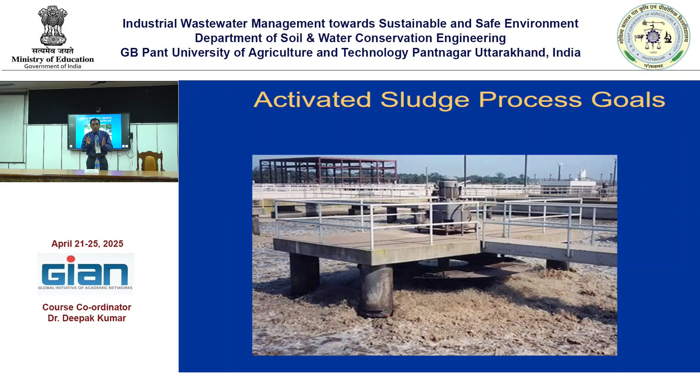But there are certain situations, if it is not biodegradable, we go for chemical processes. In the chemical process, what we are going to do is convert the pollutant or reduce the toxicity. We are making it less harmful. Sometimes we may be converting it into something which has not much impact on the environment or water quality. That is what we do.

So how did you find yesterday's site visit? See what you learned here, you can see some things are not working on it. That is why it needs continuous improvement and monitoring.

How will you do monitoring? You find out, do deep analysis, sampling, you analyze whether things are working. You want to see not just the influent and effluent, but make sure each unit is performing well.

I was giving you an example. If there are industries and they are big, they can have their own treatment. If they are small or medium, there is also provision. There are different methods to deal with the problem if you want to find a solution. That is one of the examples from yesterday.

So these are the causes. When you are discharging to a river, river means flowing - I have to add that definition today. So when you are discharging, we study about the mixing zone.

What happened? This BOD is 100, the BOD is 0 there. If maybe 1, 10, 5, 4, then you will see how much is the impact. There should be a proper mix where you are discharging. If it is stagnant, if you are discharging there, that portion will become an anaerobic condition.

And another thing, what you will see? You will see the oxygen concentration - how much is the oxygen concentration in the effluent and also oxygen concentration in the river. The river, it must be good. But whether that is happening, that you will have to see, right? Then you will find out what is the right position.

It is not that we have a discharge point here, whether water is there or not, the river is flowing that side, you will discharge there. So those are the conditions also you should keep in mind. That is very important. So what is your ultimate goal? It is to make it safe, to protect water quality and environment, create a safe environment. So you should also consider all these factors when you are doing it.

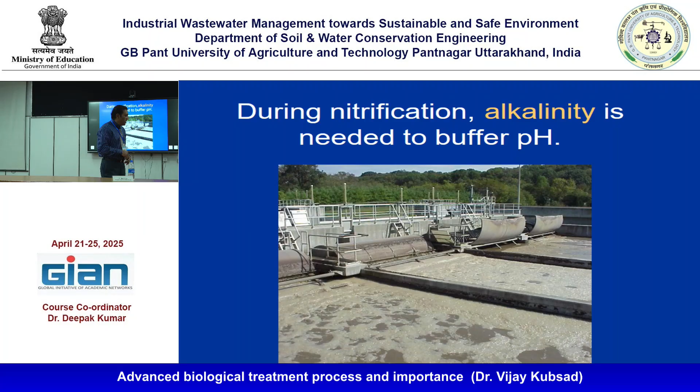And yesterday I observed two things. I'm happy that you guys were asking the questions, so I think you are good too. That's good.

You heard about COD, right? What do you mean by COD? It's not degradable, that's why there is a ratio. You should always make sure that certain things are not biodegradable. That's one.

Then, if it is a paper industry, what is another issue? It's always the color. They said in the paper industry we use decolorization, but it is hard to remove color from the system, it is difficult to remove.

So what will you do? You will have to put the limitation for the color. That is what somebody was asking yesterday, what the local people will do. See, in the general state standards, you may not be having the color limit for all industries. For other industries, if it is a food industry, you need not put the limitation for color. But if you are issuing an authorization to the paper industry, you know, in this area, this is a local area, so you should have a local limit for that.

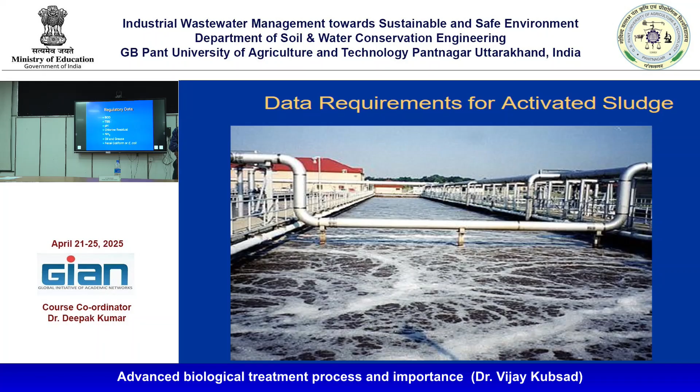So the total suspended solids, pH you know already, and chlorine residual, ammonia, oil and grease, and fecal coliform. What is E.coli? We always talk about E.coli, meaning what? If the concentration in the water is high, if you find the presence, you say that it is contaminated.

Why? The presence of E.coli bacteria shows that in the water there is a mixture of sewage. So that's why we say that is the indication that this water is not safe. That's why when you are discharging it to the river, we want to make sure whether there is any contamination, right? Your discharge point to the river should be such that in the flowing water downstream, there should not be any intake for drinking water purposes.

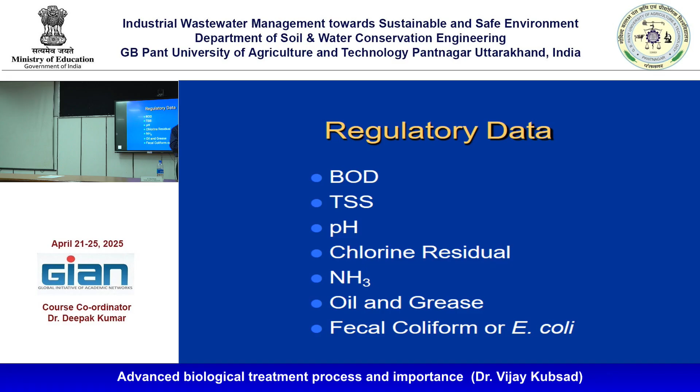There is a town, they have an intake structure there. They take the water from the river, treat it, and supply it to the people. That is why you cannot discharge upstream. How will you calculate? You can calculate there. That is how I said, what is the BOD, what is the oxygen in the river, oxygen from the industry which is discharging, and then you will find a combined value of BOD and oxygen.

By the time it reaches, it should not have any value, zero. It should just look like water. If you discharge very close to the intake structure there, that means you are providing this contaminated water to them. So those are the things you will have to think about. That's why when you find the location of intakes for water supply, you are always careful. Is there any pollution? You cannot take polluted water, invite a problem, and then start treating it. That will not be healthy. So that is the reason you should have this kind of data.

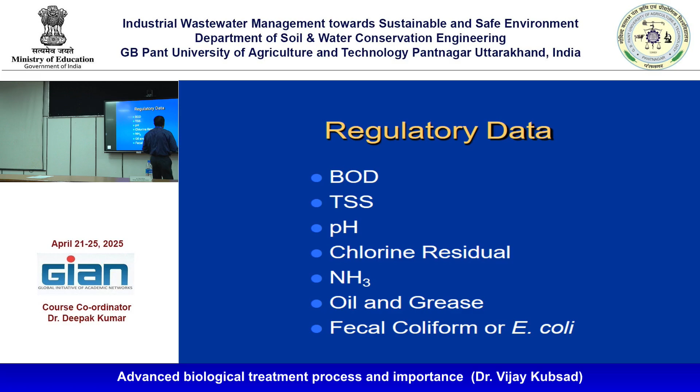And what are the approximate ranges? As an environmental engineer or scientist, you should know the approximate values, right? People working in the field, that's why that is all important. What is the range of value? You should be able to say, this is the range, you should have that understanding, right? Not just, sir, it depends upon these factors. If you start telling that, what will the other people do? So you should give an understanding because you are dealing with people who have different backgrounds. You may be knowing that it's true, it depends, but approximately what is that? That is how you do in construction.

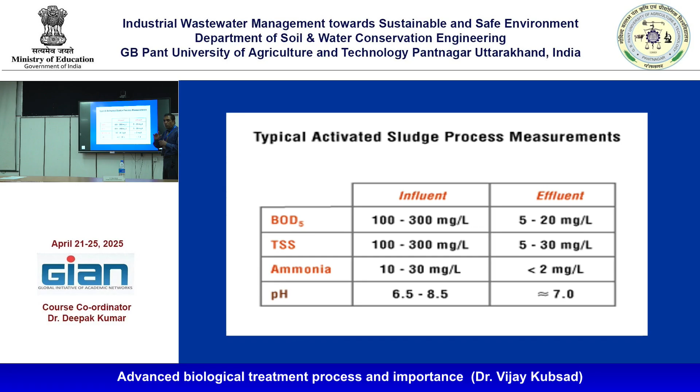BOD, influent, effluent in the activated sludge process, measurements, ammonia, TSS, pH - approximately we want to have these numbers. And process control data.

In the process control data, what we see is settleability, how much settlement of suspended solids, DO, temperature, depth of the blanket, and blanket thickness. And we see more process control data: flow rate, pH, microscopic analysis, solid concentration.

There are equipment where you can find this out roughly, and you can also go further to do the analysis. There are online flow meters, online pH meters. You should be able to test it immediately. Now they've been made handy, right?

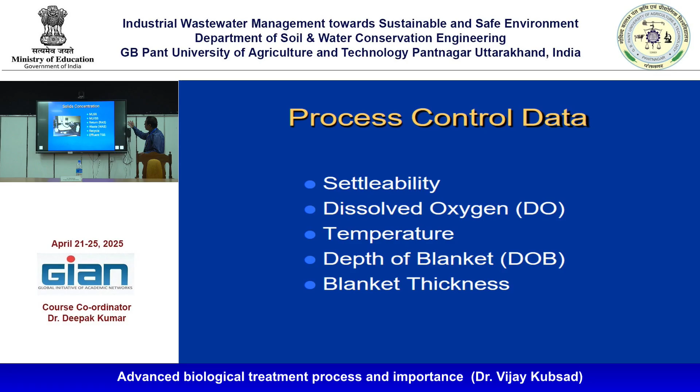And solid concentration, we talked about it - what is the return sludge, waste sludge, recycle, effluent, TSS. Then flow rate: inflow, return sludge, waste sludge. Waste means some of the sludge will be sent to the thickeners and some will be recycled. That's why it is called an activated sludge process.

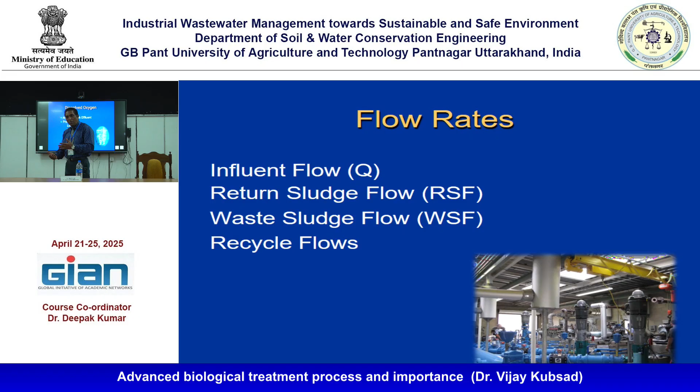Then dissolved oxygen, aeration tank, effluent profile. Aeration is done in different ways. You might have seen yesterday's aeration - aerators fixed in the bottom. In some places it is from the top. When you do that, why do you do that? One from the bottom and one from the top.

It depends on depth. If the depth is less, you want to fix it on top because it will settle to the bottom. If the depth is too high, you want to put a diffuser at the bottom so that the corners are not left untreated. So oxygen is supplied uniformly - you want a uniform mixture or supply of oxygen to the organic compound, then it will be right.

Transfers also they give - if you want more oxygen in a small space, you want more flow, then that is a design consideration. You want to have it from the bottom, the top, and the side. Because in your area in the cities, you are lucky to have a big place here. In the cities, very small places, but you still have to do it, right? So it depends on what kind of aeration system you have.

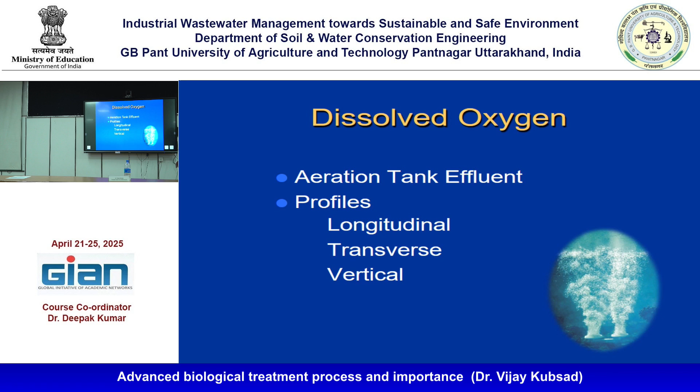Then the temperature does affect the metabolism rate of microorganisms. See, there are filaments in there. Anybody with a background in biology? Good, very good. And chemistry people also study this, right?

In case of biology, you will analyze what kind of microorganisms are there in the biological system - nothing should be unknown. There are different ways you can take a sample and find out what kind of bacteria are there, and how they are helpful. If it is domestic wastewater it is different; if it is industrial wastewater, over the years or months of time, it will acclimatize. Certain bacteria which are more immune to that kind of pollutant start growing and they will be helpful.

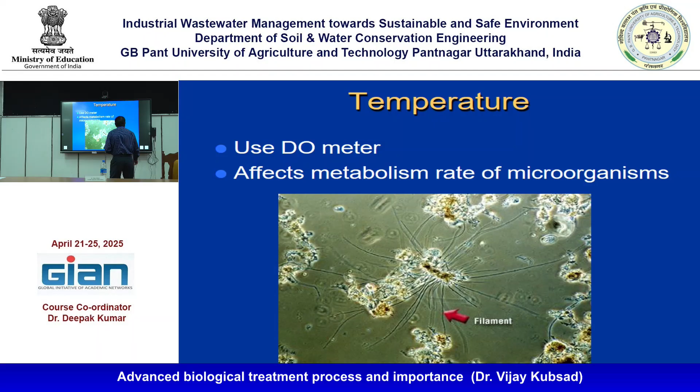Then the settleometer test - use a settleometer, don't use a graduated cylinder. Fresh samples, take the sample near the effluent weir of the aeration basin. Where you want to take a sample is also important. You don't want to take a sample where there is less pollution - we want to see the maximum. You cannot design things with a minimum value or average value. You want to design for a maximum, then you want to confirm it also works for a minimum value.

So that is how we want to make sure when you do any inspection, first you will see where your sampling is, how you decided it, why you want it here, why it has to be here. Those are the things you will have to look for. You want a representative sample data so that you can make a good design and good determination and decision.

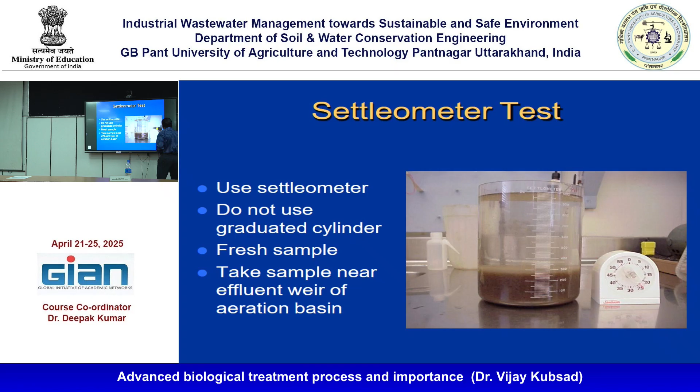If you want to create a model, you should have perfect and good data to design it. If you have taken only a few unreliable data points and you do the model, how will it be? You have to justify how your model criteria works. That is why those data are important. How does a clarifier work?

Flocculating, settling, compacting - allow the biomass to settle to a reasonable thickness. Flocculation and clarification clarifies. We add certain chemicals if particles are not settling, because colloidal particles are negatively charged and want to stay apart. So you add chemicals to reduce that distance, bring particles together, make them bigger so they can settle. That is flocculation - you add chemical, mix it, then take it to a peaceful place to settle.

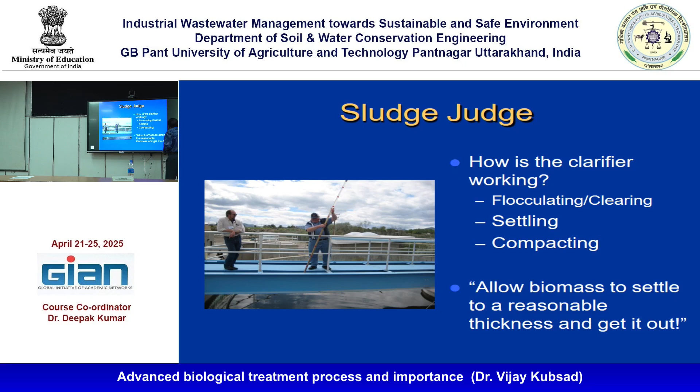Clarifier problems typical causes: bulking, sludge quality, hydraulic overloading, denitrification, old sludge. You want to keep removing the sludge, keep the system fresh and efficient. The job of those responsible is not that easy - it's very important what you do day to day to make it efficient. If your designed efficiency is 85, 90, 95 percent, but it's performing at only 30%, what will you do? You calculate at 95% - how will it work? That is why in the real world this data is important. That's why you do daily monitoring, weekly monitoring, monthly monitoring, analyze it, and apply your mind to check whether things are working in the right direction.

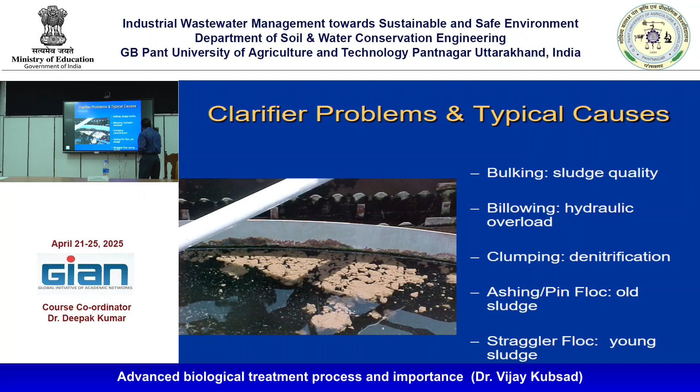So microscopic examination includes general floc analysis, protozoa counts, metazoa counts, filamentous abundance and location, identification of filamentous organisms. They are responsible for degradation of organic compounds to a stable form - stable meaning there is no smell, just carbon dioxide and water.

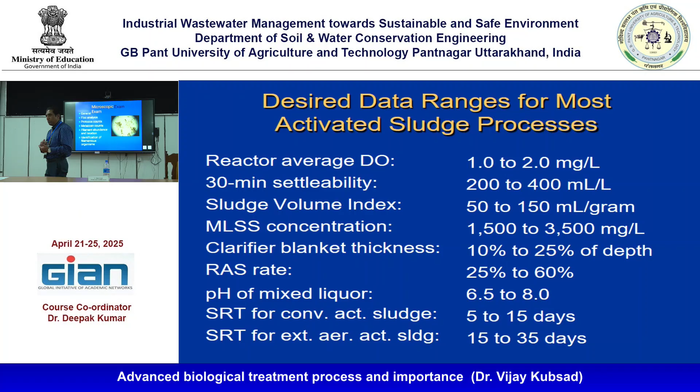The moment sewage comes out of the house, the reaction starts because healthy conditions, temperature, and oxygen are there. So you find out how much reaction occurs by the time it reaches the treatment plant, because there are open channels taking it to the sewer system. In other countries they use closed systems because of different climatic conditions, and nobody wants it open. You have to be careful.

Today you have seen the consequences of open channels and open sewer systems - it causes flow problems. You might have seen many sewer systems that are designed but are just stagnant. This is because you need proper flow and control of suspended solids. People easily throw things in there, and the channels become like a series of tanks. That is why now people want a closed system so they can maintain it - you cannot add anything to it. So if any industry is discharging high sludge or high suspended solids, this will cause a problem.

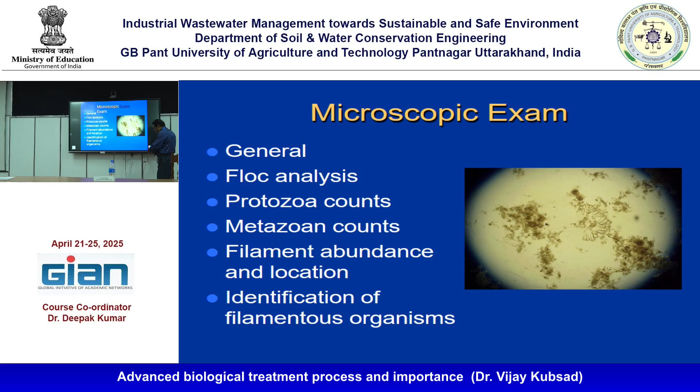Examinations can be done by many methods, like scanning electron microscope, which you guys might have used. You find out what kind of bacteria are present, what they are, and whether treatment is actually taking place in the biological system, or for particular pollutants. I will explain a bit more about why you do bacterial analysis - whether it's just ending up in the sludge, or whether treatment is actually taking place. All of that has to be analyzed.

Relative predominance of microorganism versus F by M ratio - I mentioned this a little bit. That is how the whole system works. You do analysis to find out how much VSS, volatile suspended solids, the microorganism, is there. In the oxidation part, you want to maintain the F by M ratio properly. F stands for food, the organic compound, and M is the microorganism population, both in mg per liter. That's why it's a ratio - we want to make sure that ratio is maintained.

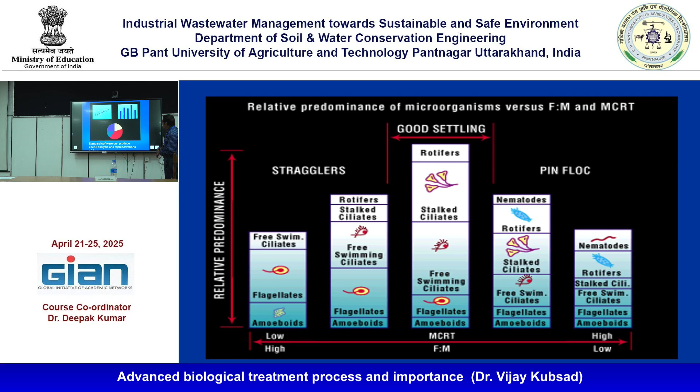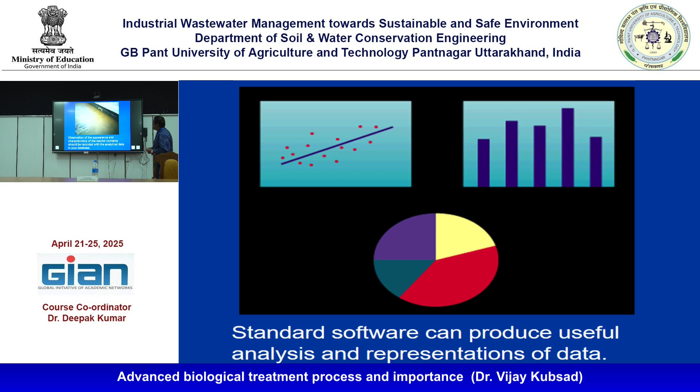Standard software produces useful analysis and representation of data. You analyze and find out what is going on - what is going on is not hidden, it is there. Observation of the appearance and characteristics of the reactor content should be recorded along with analytical data in your database.

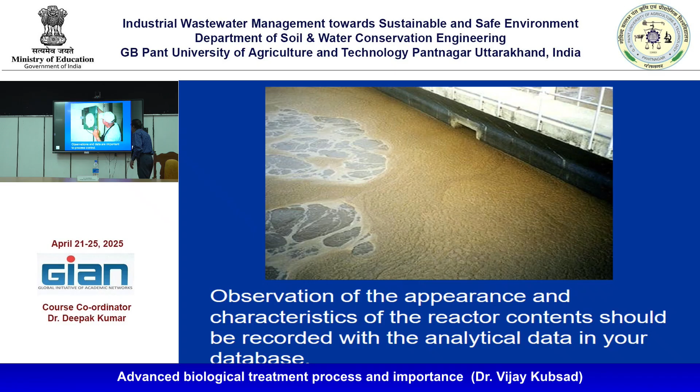That is why the major responsibility of cities is to protect the infrastructure. That's why you always keep an eye on the influent - where it's coming from, what is the concentration, is it causing any issues. So observation and data are important to process control.

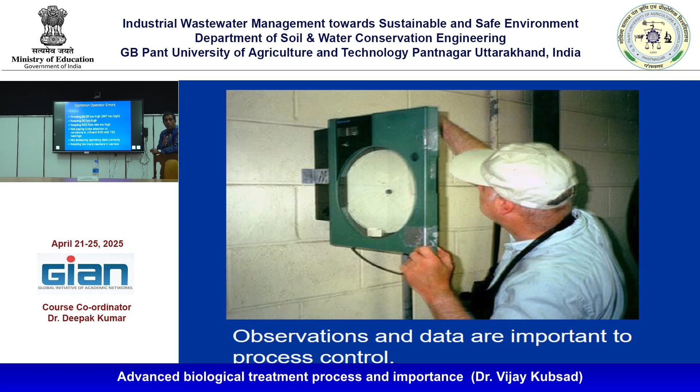Common operator errors: keeping MLSS too high, SRT too high, keeping DO too high. High and low are not good because at the same time you have to be economic. You cannot use energy enormously and make it uneconomical. Even if you need only 50% energy, if you're spending 100%, how is that economic? So economic people will catch how you are running.

So how can you do that? You have to analyze every corner and see how much is required, because the treatment plant is designed from a minimum to 30 years. What is the maximum? See how much is required - there is flexibility, that is what you will have. So keeping DO too high,

keeping recycling flow rate high, not paying close attention to variations in the influent BOD and TSS loading - how much is the loading. We talked a little about slug loading - suddenly if you have a lot of high hydraulic loading as well as organic loading, it will disturb the system. That's why not analyzing operating data correctly is a problem - the numbers are important, you have to analyze the data correctly.

Then keeping too many reactors in service - that is why you design multiple tanks, because you don't know, you might have seen variation even in the sewage inflow.

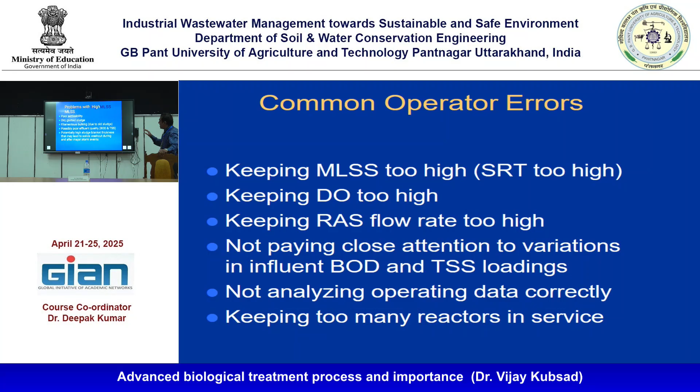I said most of your diseases, about 80%, are related to water. So you have to be careful.

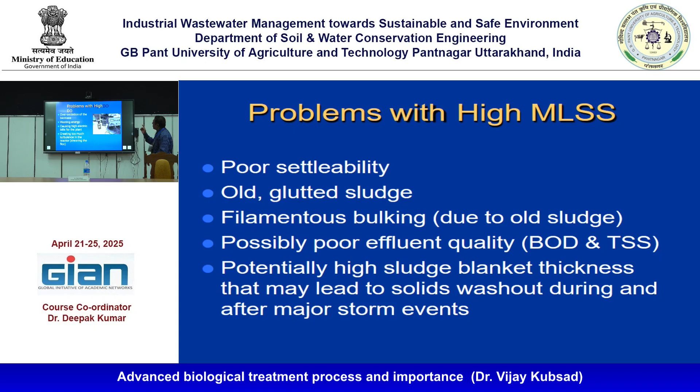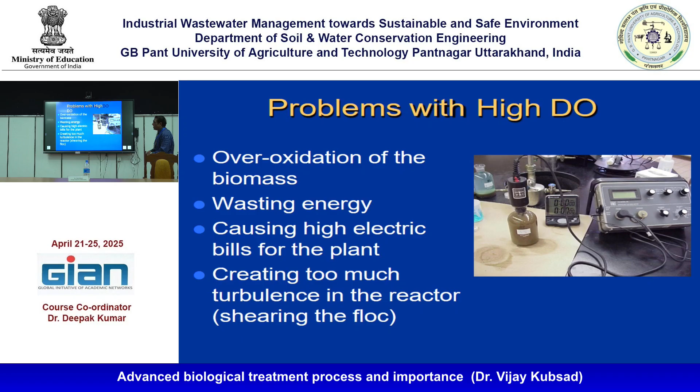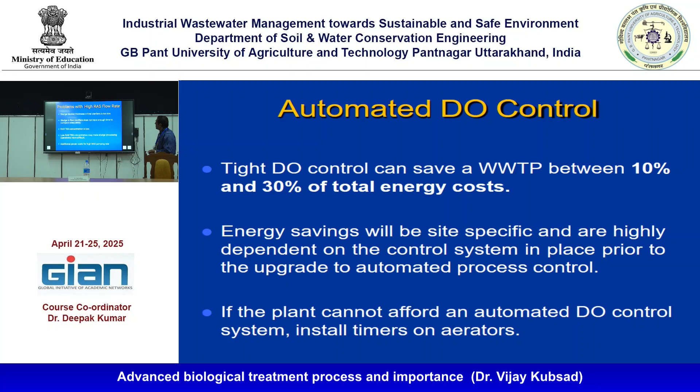Wastewater is produced 24 hours, 365 days. So a little change, a little saving, makes a big difference.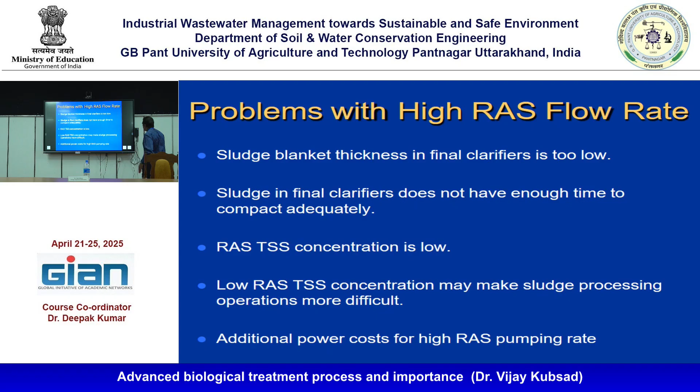Problems with overlooking influent variation: inefficient use of aeration equipment, daytime organic loading, and nighttime organic loading. That is why I said organic loading also will change.

Daytime - in the nighttime everybody will sleep, no sewage is produced. Daytime, in the morning, everybody wants to use it. There is a certain variation, so what we do is put an equalization tank to make it uniform.

Nighttime nobody uses water. Morning, everybody uses it during about 6 to 8, 10, 11. Afternoon there is none. So there is hourly variation.

There are also seasonal variations, day by day variations. If a big festival is there for a week, people use a lot of water. So all that has to be considered, and it will reduce a lot of the energy required for the reactors.

Wash out of biomass from the reactor to the clarifier during a period of high infiltration, and wash out of biomass to the effluent due to high flow rates in the final clarifier.

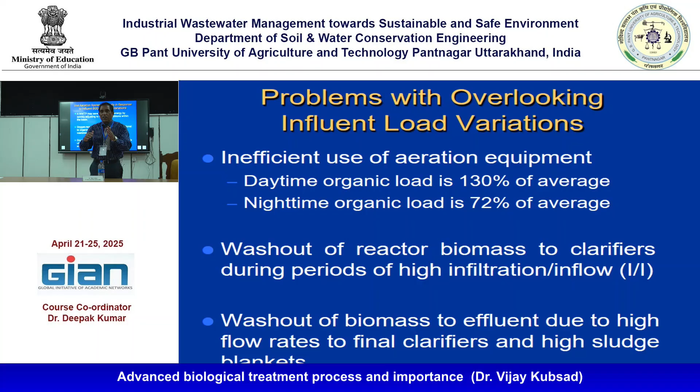So what happens if there is a slug load with maybe low organic load but a lot of hydraulic load? You will not be able to give a proper detention time, and as a result your sludge will go along with the effluent.

See how precise it is. We have an online system where you can see how that is going - you can physically see the numbers changing. That is what automation does, and now they are adding a little bit of AI on that. So help is always there.

Oxygen demand for the aeration drops in the middle of the night and peaks in the morning. That's why when there are flow changes, your oxygen requirement also changes, because oxygen requirement and organic loading go side by side, even the hydraulic loading. So that is why it is important to have a balance.

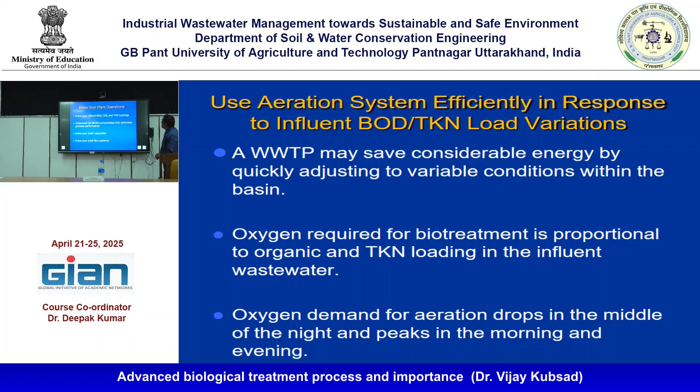Know your plant operation, know the determination of MLSS concentration that optimizes process performance. Know your basin capacities, keep track of your plant flow pattern. How do you do it? You analyze the data and see what the flow is, why it is going up, why it is coming down, and what we should do.

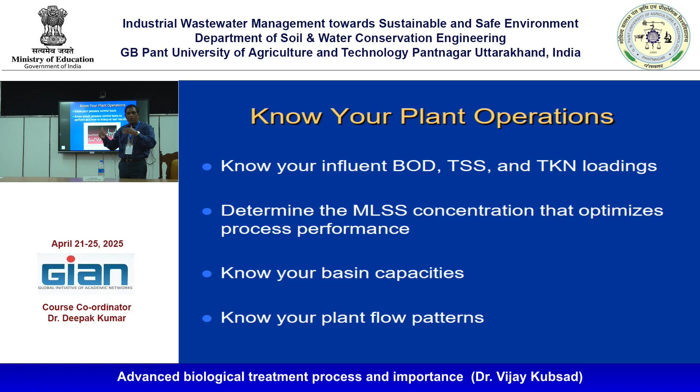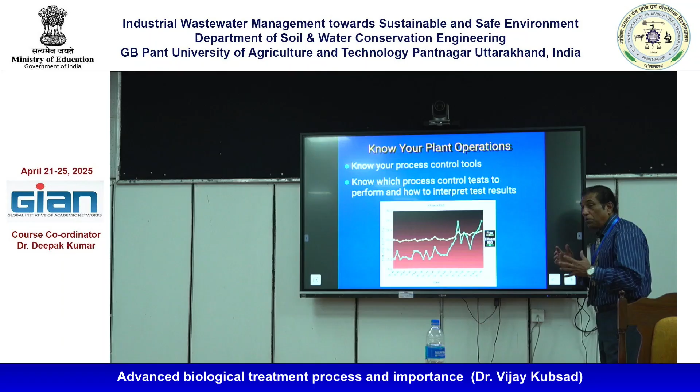You will learn and become smarter and smarter every day. This is how you will have to interpret the results and analyze them.

Reduce aeration, reduce nutrient discharge - that is important.

In an oxidation ditch operating in aerobic mode 24 hours a day, the expected effluent nitrate nitrogen should be a certain value. You should know the approximate value of these nitrates, oxygen concentration, loading, hydraulic loading, and organic loading.

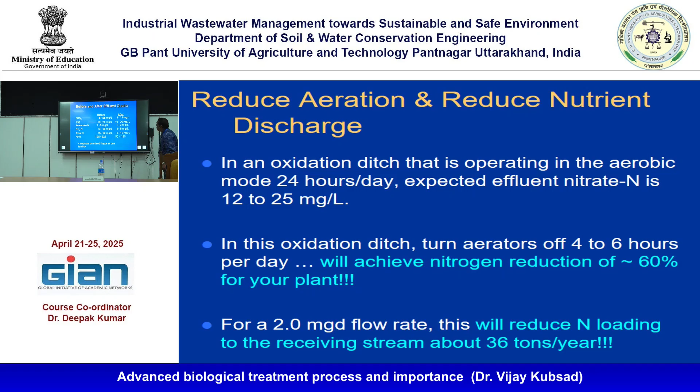Before and after effluent quality, what should be the impact on the mixed liquor at one facility? One example of how it was. This data changes from treatment plant to treatment plant. You cannot apply the results from one to another because parameters are different, and authorization is different.

If you are able to authorize to do this much, the industry will do that much only. Whether it is right or not, somebody asked, the professor was asking a question. Your question was right, but who has given the authorization? How will we interpret it? That is what I was telling - they have given it. But if you say what is the result, why will he answer that? He will not answer.

I am not responsible for that because authorization is - see, these are important responsibilities. That is why if you are there tomorrow or today, when you start working there, if you are working, you are responsible. Easily they will say you have written it. You can say, if you are learning, yes we have written it, we will change that, we will take legal advice. Whenever you write, you will learn, you will become more smart, right? So that is all.

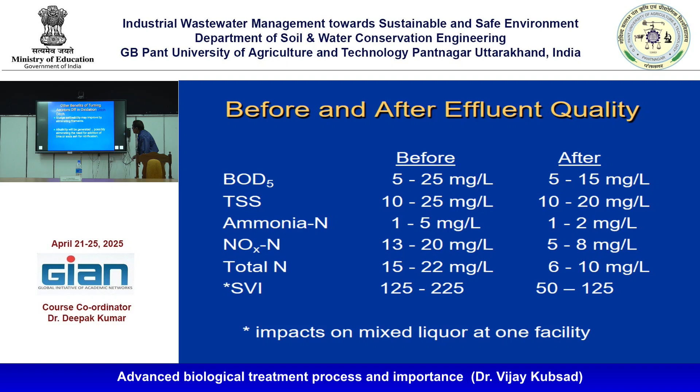Other benefits - turning aerators off in the oxidation ditches if it is not required, no need to run that. If there are 3 or 4 oxidation ponds in series, you see how much wastewater is coming in, that only you will use. The others you keep extra, clean it, make it 100% efficient. That is why you should always do one or two extra, not the minimum. That is why we do for minimum and maximum, and accordingly we go on.

Alkalinity will be generated, possibly eliminating the need for additional lime soda. Alkalinity will be generated, then you have to bring the pH down, you have to make it appropriate.

I have to put questions - no questions, I will say this later. So, any questions? Any questions?

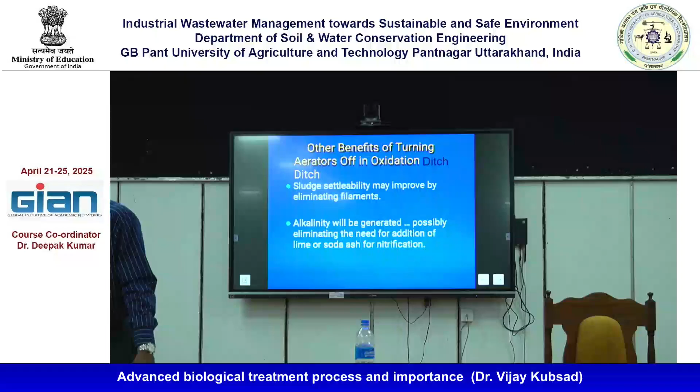So what did we learn in this? To summarize, what happens, what did we learn in this? That is important, what you learn. Yesterday you saw how the biological system works, now you have an understanding. The biological system works - bacterial load, it goes from here to here, then it is removed, organic compound is removed, converted into stable compounds, nitrate is removed, BOD is reduced, TSS is reduced. At this stage, this is a biological process.

Then if you are discharging, we give a little disinfection or ultraviolet treatment and then make it safe for discharge. If you are applying it to a river, you make sure it will not cause harm. The river means a flowing river - I should always say flowing river, right? River is always flowing, right?

So if you are applying it to the land, what should be your discharge? The discharge standards change, isn't it? If you are applying it to the land, a little suspended solid is okay, but how much is okay you have to see. You should have a monitor - their standards are different. Why are those standards different? Because it is possible to accommodate - you don't want to spend more, yet at the same time you also want to give the industry people some leeway.

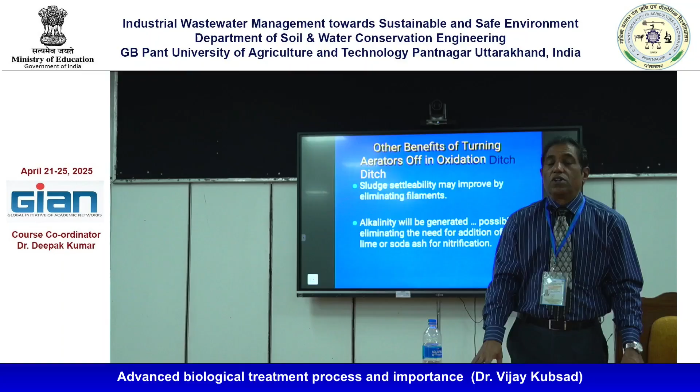That is why you want to use that privilege, right? So that is why you should make sure how the standard works, what is needed, where it is - that determination you will have to make, right? Where it is going, how it is going, so that is what we study, the whole process, how this works.

Today what we did is see what the numbers are, how best you can operate. We are going a little further - when you know the process, then you have the values. This is the process, okay, what it means - if I say 20 to 10 means what, 50 to 100 means what? You should be eminent, and where you are applying, I gave you an example.

Where you are applying, which group you are addressing - different groups give their expertise on that. So those are important data.

What you studied, I have told you earlier also, you have to write half a page on what you have understood. That is important for you. Not only this, everywhere you do, just write for half an hour, half a page. Understand what you did, what you have done, what you learned. Simple. You may read it later, just keep it for yourself. It may be useful. That is always good, writing and keeping it.

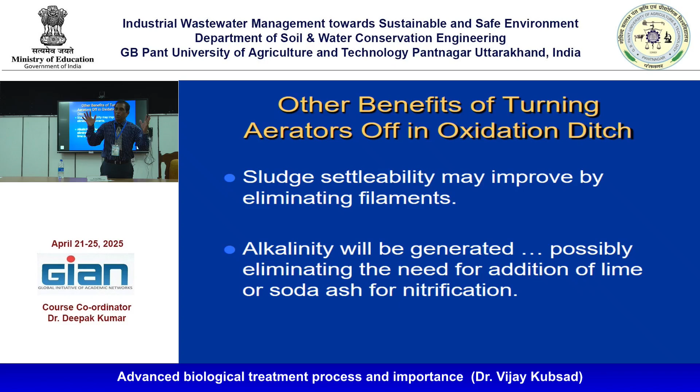So that is what you learned today, what you did, different group, different background, how you use the expertise, what you need, what error you make - it is not 100%. You understood now how much judgment is required. Why do you learn all this? Why do you learn all the theoretical background? You do masters, you do study, different studies - what do you do? To apply, right? If you are not applying, what happens? This number has a meaning.

That is what I said - if I say the number means wastewater has a language. That language you should understand because you are a competent person. If you are a competent person, if you are an expert, you know that number. That is why different backgrounds you take an expert.

You do like that. When you write something, can you read this? This, because what you write, a common person should be able to understand. You should be able to understand yourself also. Today you are writing, and after some time you see, I don't understand what I have written. I wrote poorly, I could have written this way. So that is how you will become smarter and smarter if you put your focus on it.